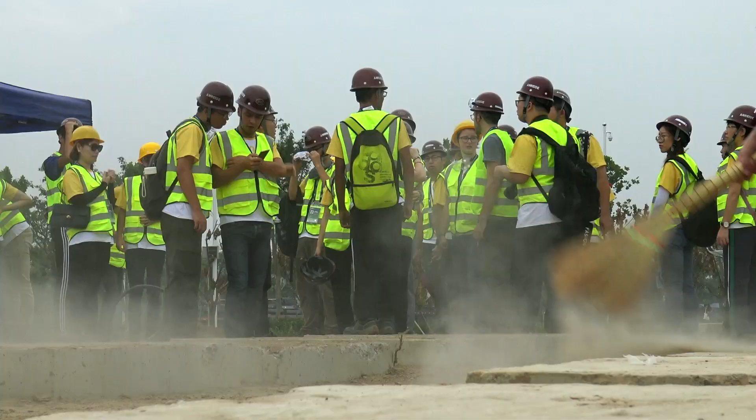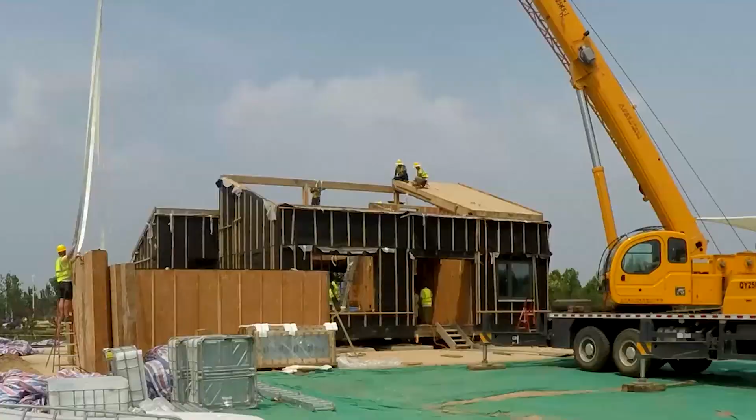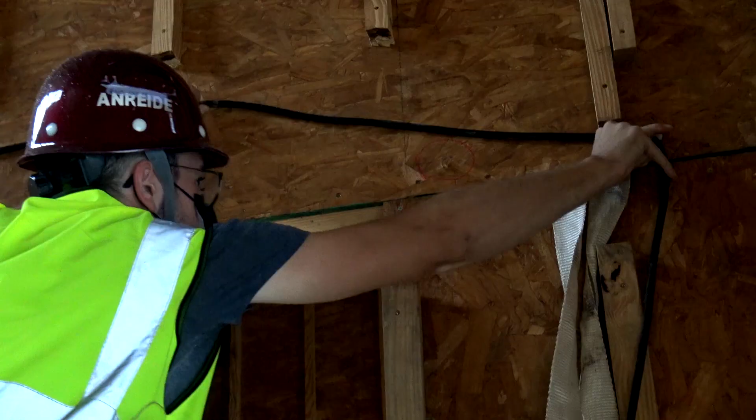For the first week of the Solar Decathlon, Team Jia has been busy building the main structure of the house in just 3 days, starting to set up the electrical and ventilation system, and preparing the outside scenography.

Working with an unforgiving sun, or under heavy rain, all the teams gave all they got.

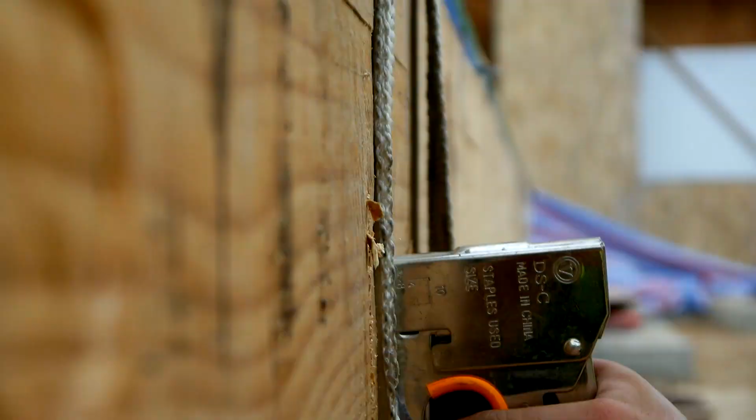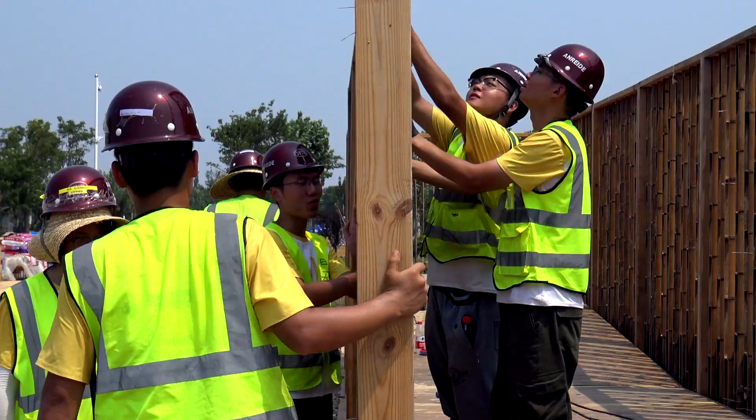And yes, I said teams, plural, because Team Jia is not only an assembly of Chinese and French people, but it is also composed in groups, branches, each one with their specialization on one part of the Jia project. These teams within the team work separately, but all at the same time on the various aspects of the construction and beyond. Let's go and meet them.

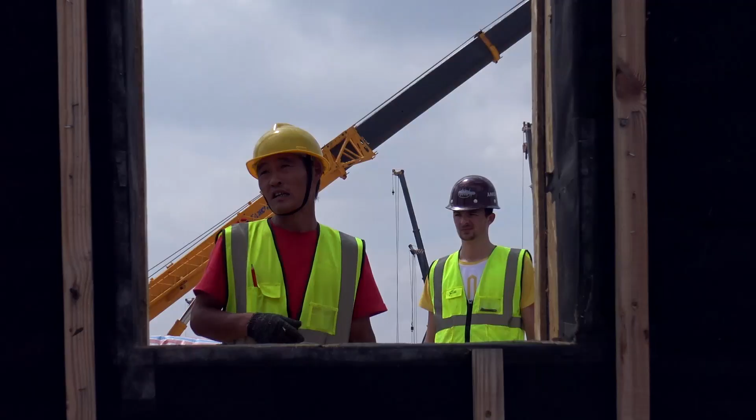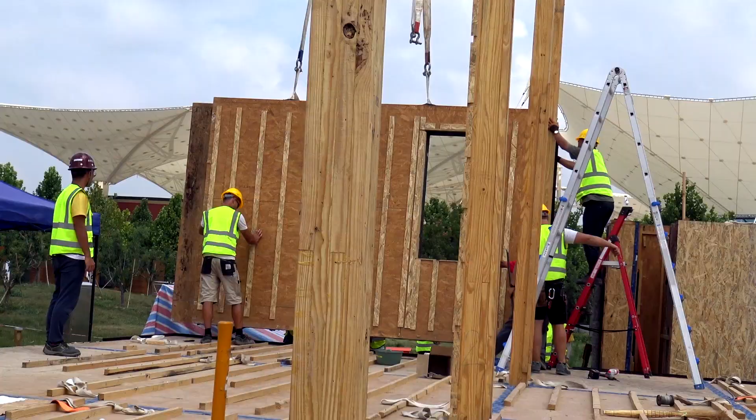Let's start off with the construction team. First 3 days we assembled the house, and since then we've been doing the inside finishing such as windows, doors and flooring. Since day one, they are supervising the reassembling of the different modules previously built in Xiamen, putting the house back in its original shape.

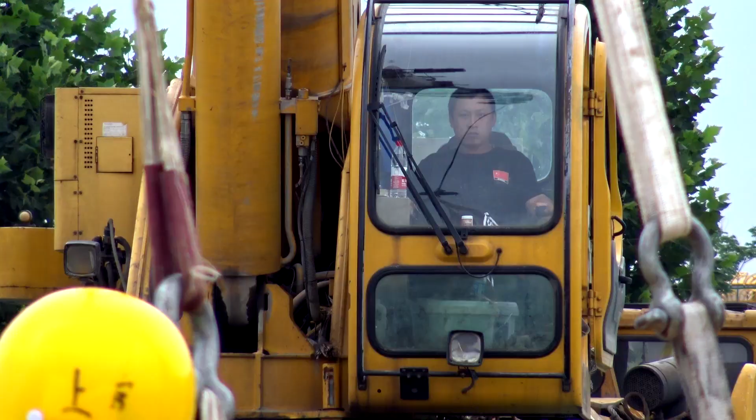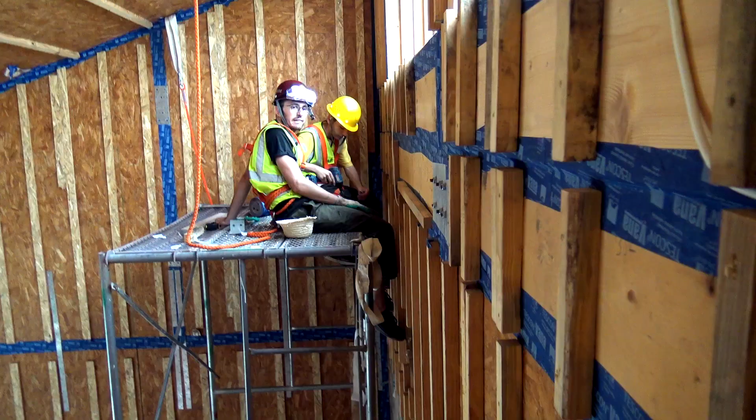But there wouldn't be any house to build without the architecture team. They conceived the outside look and the interior design to make it the most comfortable for its inhabitants.

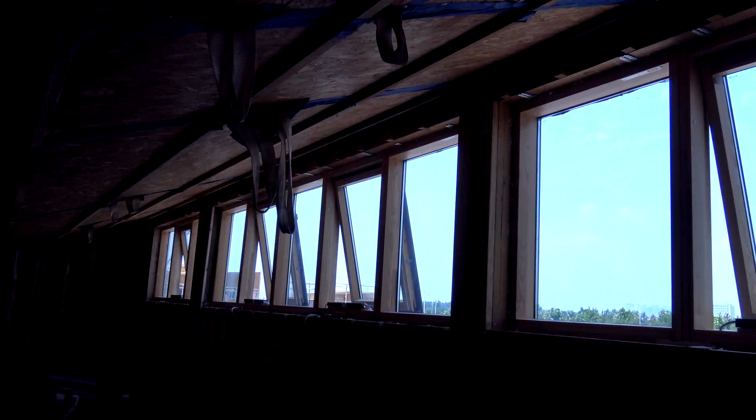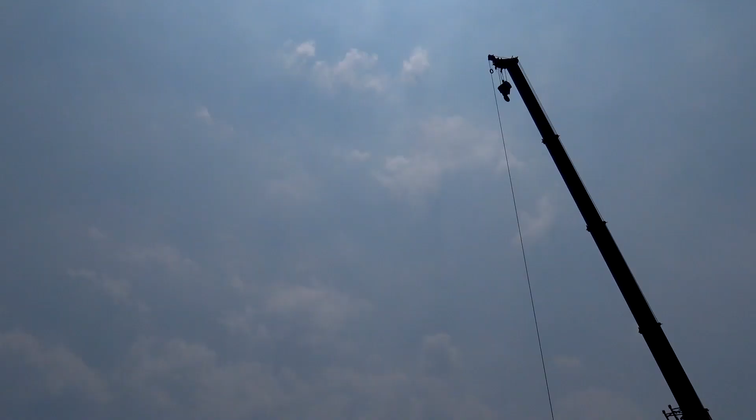The Jia house also packs some cutting-edge housing technology to connect its owners with the home. That's where the innovation team comes in.

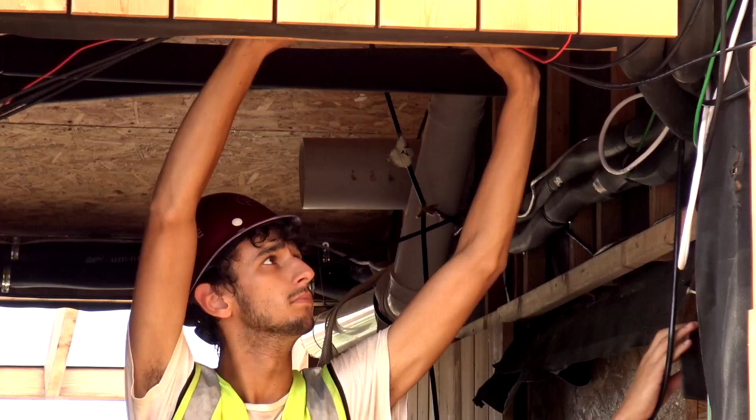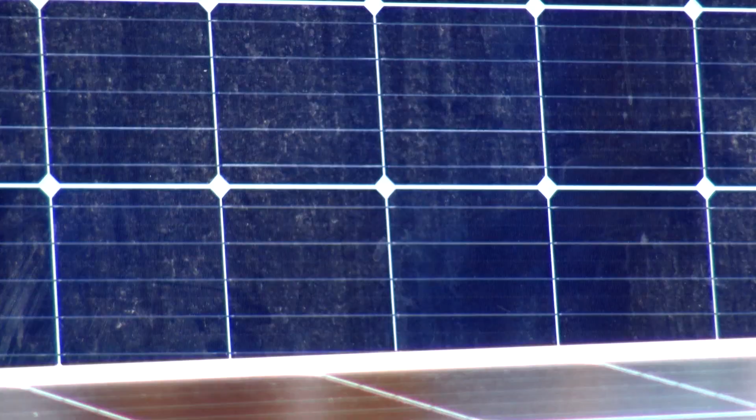Along with these technologies, other systems like the heat pump, the HVAC, or the photovoltaics must be properly installed to match the competition goals in terms of energy consumption. That's the job of the engineering team.

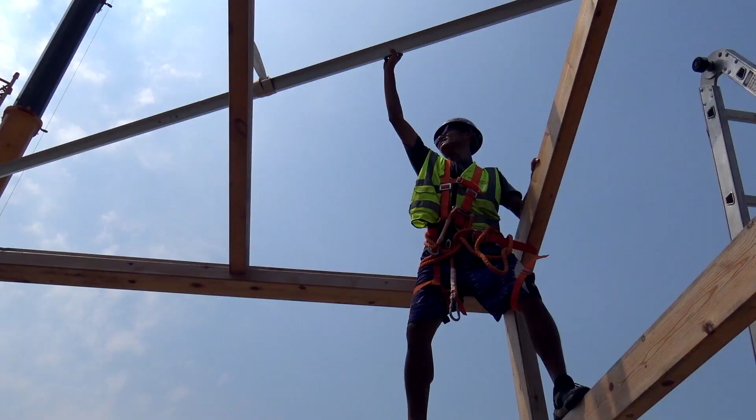We are doing outside deck and inside furnitures, and also we are going to waterproof and do electricity and HVAC preparing.

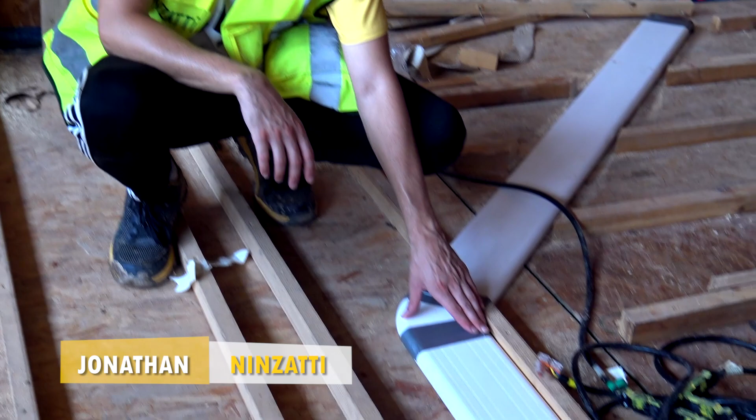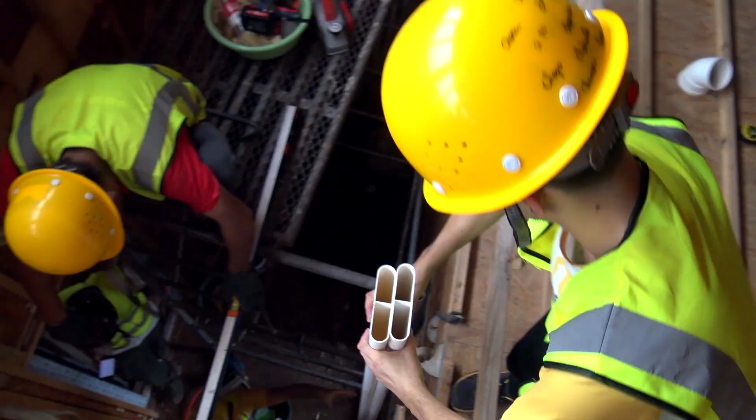With more than 80 people from 2 different continents on this project, it would be easy to lose track of it. Hopefully, the coordination team is there to keep everyone working together in the best conditions.

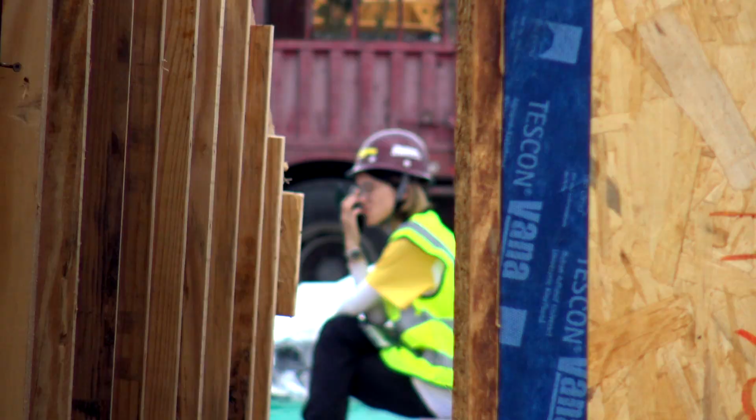Every day, so many things. I need to contact our sponsors, and contact our teachers, and reply to many things to the committee. Every morning, me and Nat, we have a daily meeting with the committee. Yeah, I need to cooperate with many people, with our team member, team leaders, to keep our construction good.

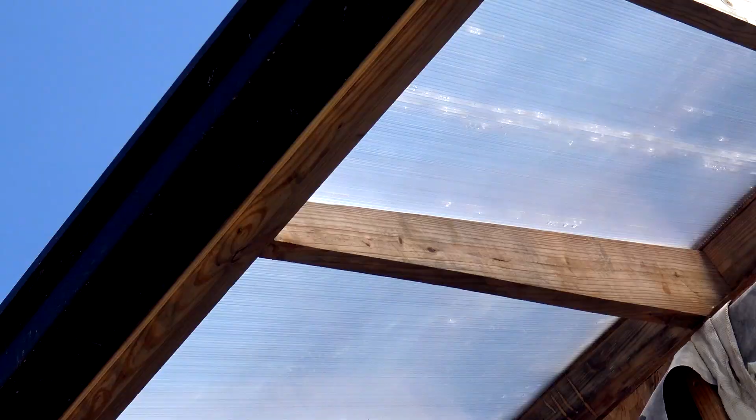I'm the safety manager of the Team Jia, and I have to check everyone's hard hat, safety shoes, and the vest. Safety is first.

Stepping out of the construction itself, a project that big requires a lot of paperwork and organization. In the shadows, the administration team makes sure everyone here at JIA+ is provided with what they need to succeed in what they do.

I've joined this group since that year and I'm the member of the finance group. And such as like to help everyone to buy something and dealing with the tickets and buying some water for everyone every day.

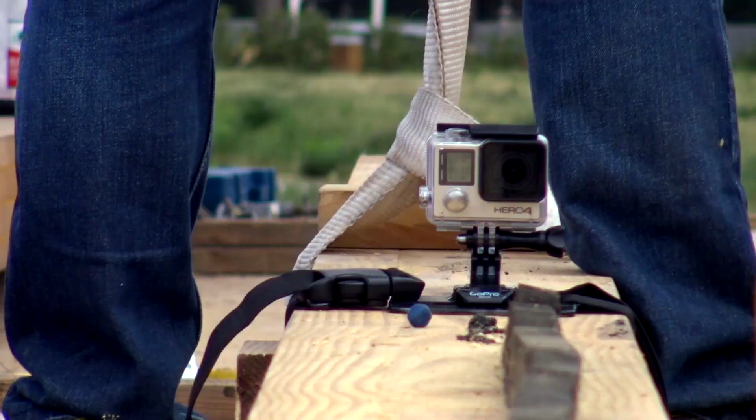No matter how innovative or original a project is, communication is essential to make it real to the eyes of the public. To that end, the communication team takes pictures, record videos, write news about the project, and post it all on social medias.

My work is to make sure that everybody gets daily information about the project, what is going on Facebook, Twitter, Instagram, and posting photos.

I take care of the translation things because we work in English, so we have to translate some papers. And we work together for the Sino French same day, that's the JIA+ day.

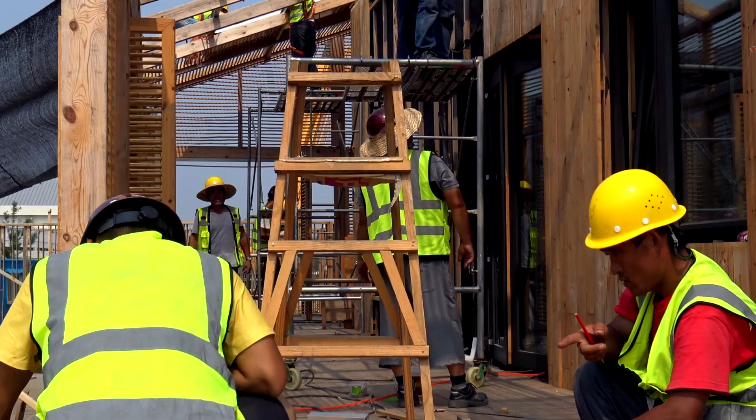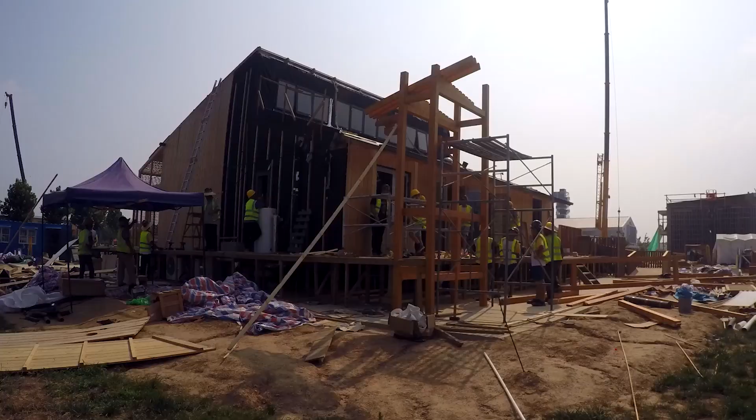JIA+ is not just an architectural project. For each and every one of us, as individuals and as a team, it is a chance to learn from each other. Every people on those teams wouldn't be here without the others. That's how we worked our way here, and that's how we build it now.